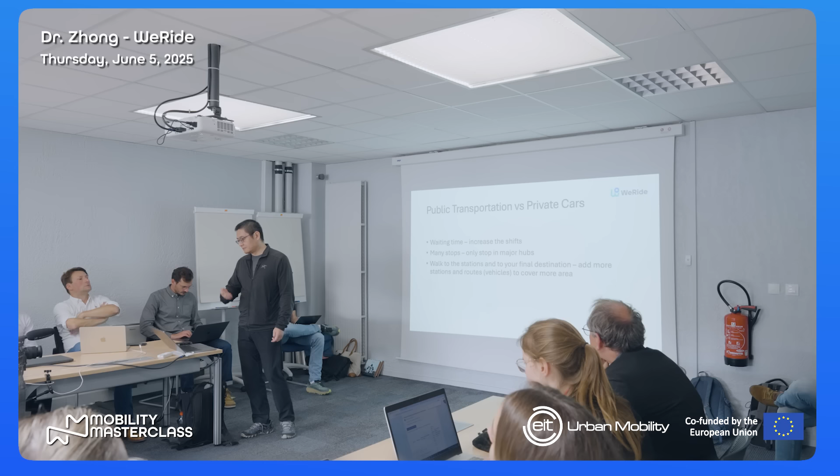Compared to private cars, public transportation has some shortcomings. The first one is the waiting time. You have to wait for the next bus. But with a private car, you just go anytime you want. So to reduce that waiting time, usually you can increase the shifts or the number of vehicles. The second is there are many stops, but not every stop is your stop. With a private car, you go from door to door. You only stop once. The way to reduce this shortcoming is you only stop at major hubs.

And another one is walking from the station. You have to walk a long distance from the station to your final destination. Actually, that part makes a lot of people choose private cars rather than public transportation. The only way to solve this problem is to have more cars, more buses, more routes to cover more areas, but that requires a lot of investment. And in many cases, that's too expensive for many public transportation operators.

So to make it better, I think now many people think it should be a tiered network. That means there's a backbone. It's a train or really big buses or tram or subway. They have really large capacity. Hundreds of people can take one train, and they have fewer stops. They only stop at the major hubs, and of course they have fixed schedules. Usually these major hubs can reach within 1 to 2 kilometers of your final destination. But that's not enough, because the last mile, the last 1 or 2 kilometers, how do you cover that?

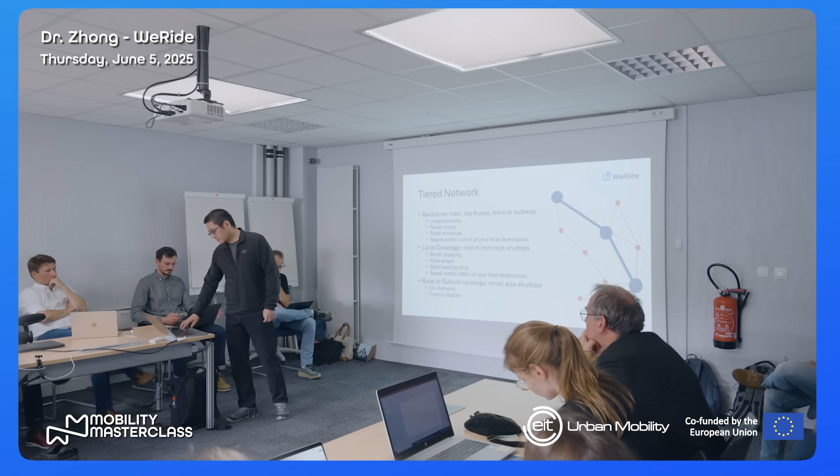But the thing is, in order to have local coverage and rural or suburb coverage, you need a lot of vehicles. That means you need a lot of drivers. And I think everybody here knows how difficult it is to hire public transportation drivers. Even in China it's the same, because public transportation drivers have a higher standard, so it's even more difficult than hiring taxi drivers. So that part actually makes a lot of these plans not viable or too expensive.

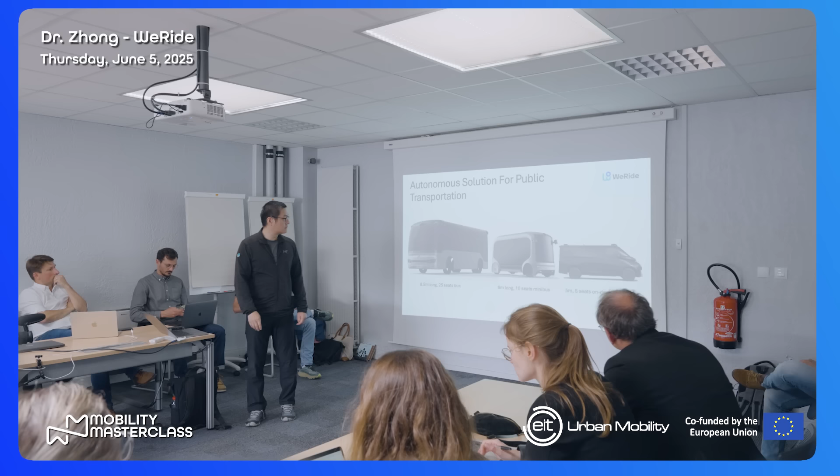So here comes, I think, the autonomous solution, because we don't need drivers anymore, just the vehicles. I think this is the only viable and economical solution for this tiered public transportation system. In the backbone, we still use trains and big buses or big trams, but for local coverage, we use autonomous driving vehicles. And here is our solution. We have several different types of vehicles to help build this tiered solution. The first one is an 8.5 meter long bus. It has about 25 seats.

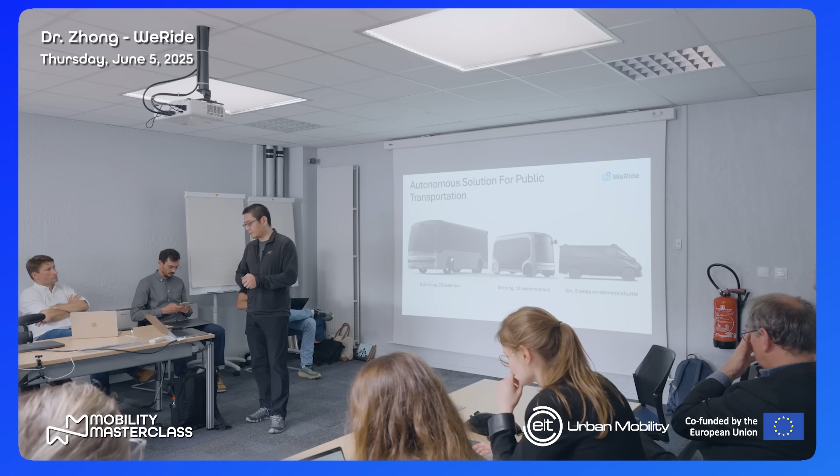Later I will talk more about the details. This is the latest version. We are still in development. The middle one is the one we just took a ride in today. It's 6 meters long and has 10 seats.

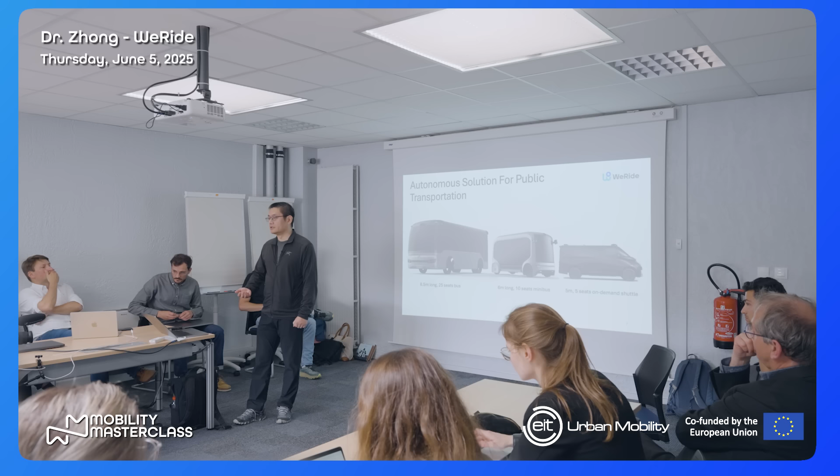Well, the version we took today has 8 seats, because it's modified to be able to install a steering wheel because of the homologation stuff. But if we forget about the steering wheel, we can make it a 10-seater. And the third one is a 5-meter-long van. It has 5 seats. It can run as on-demand shuttles for rural or suburban area coverage.

So the big bus, 8.5 meters long. This is our prototype. We're currently working with the public transportation company in Guangzhou, where our headquarters is. We estimated that by deploying this autonomous driving bus, even in China, we can save about 18% of the operational costs. We know drivers in China are relatively lower cost than drivers here, but even in China, we can still save on operational costs.

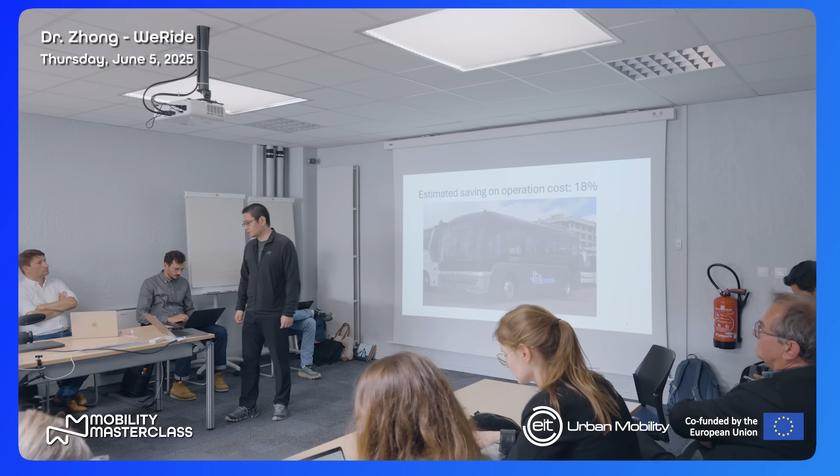And after the pandemic, a lot of public transportation companies or cities ran out of funding. So this kind of savings on operational costs is very, very attractive to local public transportation companies. So we hope this year or early next year we can release this bus. We can begin to replace normal buses from the public transportation companies every year. So maybe in the first year, 5% of the vehicles will be converted to autonomous driving, and then we continue to increase the percentage.

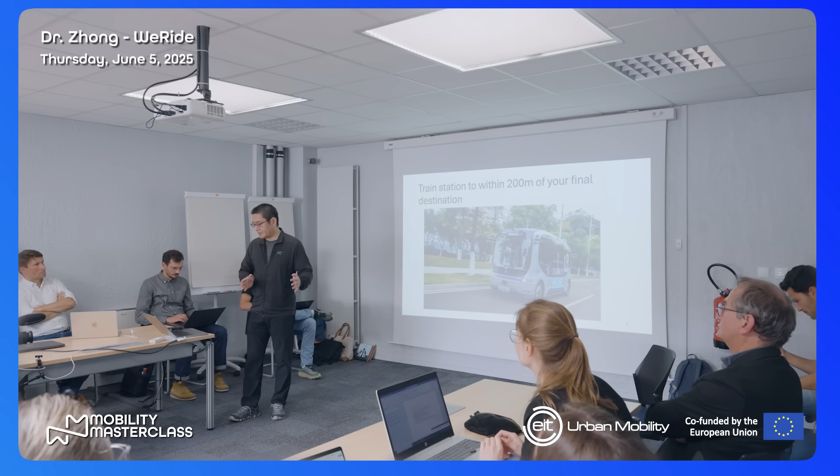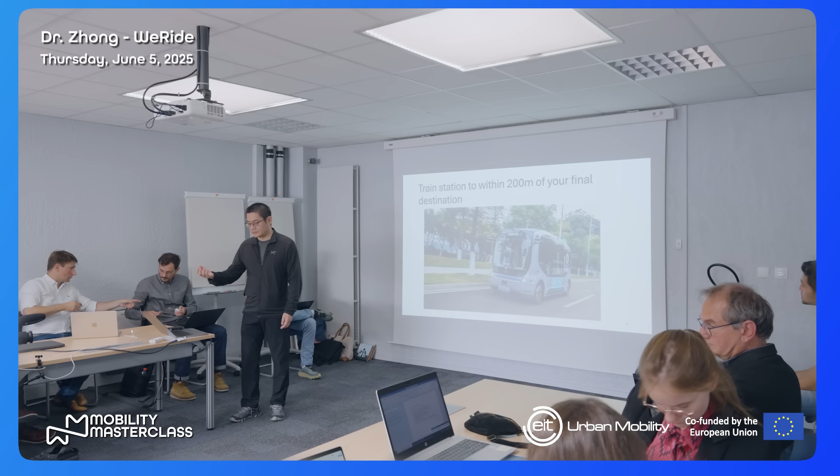And the minibus actually is our first product, because this one is smaller. The technologies we use in this one are closer to the robotaxi we developed. Basically, we use exactly the same technology. We just copy and paste it to this vehicle. So the idea is to use this one to connect subway stations to passengers' final destinations, within 200 meters of the final destination.

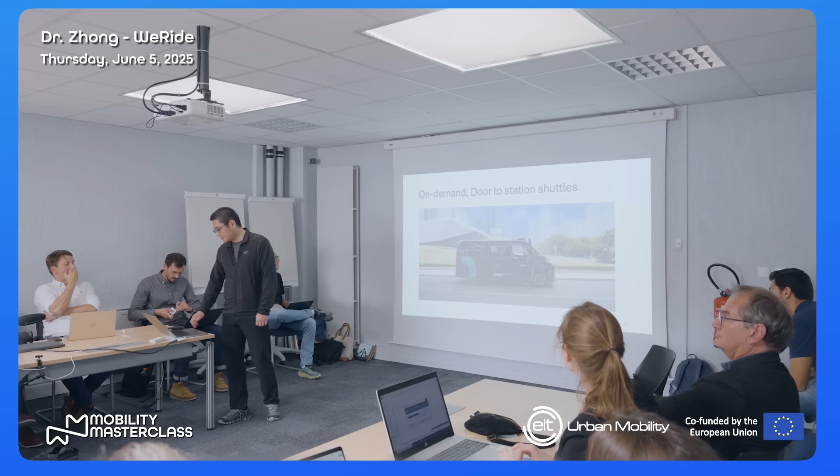And this is the on-demand shuttle we developed with a Chinese OEM. It's designed from the ground up for level 4 operation, so it has a fully redundant chassis and everything we need. And we released this vehicle, I think, last year. In China we use it for taxi purposes, but it can also be used for rural or suburban public transportation coverage. Actually, we're working with Switzerland on some similar vehicles, but not this particular one. But we hope this one may provide better service for that purpose. So that's the product lineup we have.

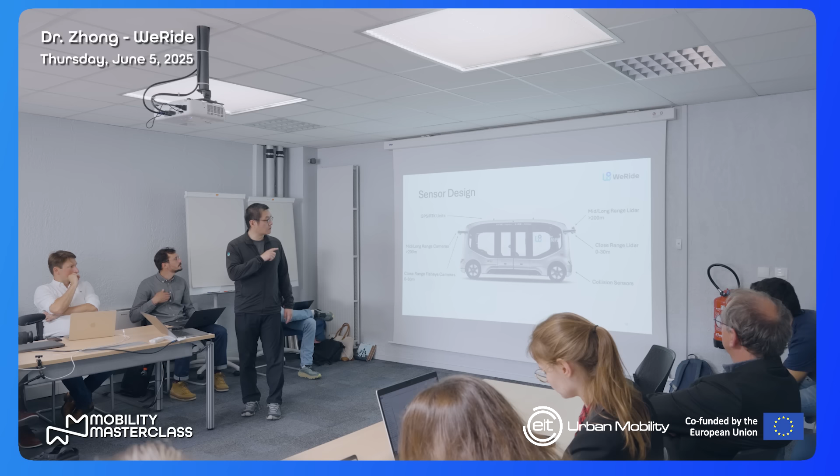And next, I will talk about the technology. This is the engineering part, but not that deep. I think everyone can understand. So basically, we use all state-of-the-art setups for safety and performance. For example, this is our mini shuttle. We have a lot of sensors there. They have 360 coverage all around the vehicle, and there's no blind spot. All blind spots are covered by two kinds of sensors, LiDAR and camera.

So we have the mid to long range LiDAR. They can detect objects farther than 200 meters. And then we have the close range LiDARs, because the long range LiDARs have blind zones close to the vehicle because of the viewing angles. The close range LiDARs can see anywhere from 0 to 30 meters. And we have similar coverage for cameras: mid to long range for 200 meters, and close range fisheye cameras to cover 0 to 30 meters.

And also we have GPS RTK units to have high precision localization for the vehicle. And also around the vehicles, if you can see these bands, that's not for decoration. It's actually collision sensors. So whenever there's some collision with the vehicle, the sensor can detect that, so the vehicle can stop to prevent any secondary damage. So this is the sensor setup for our minibus.

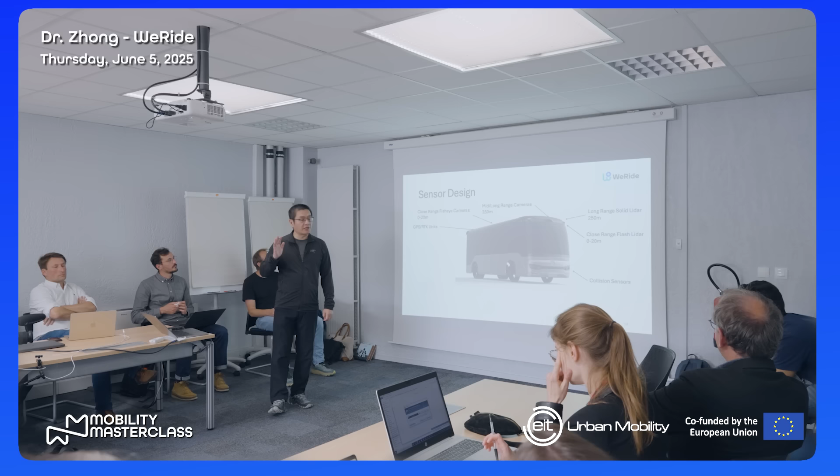For our larger bus or all our next generation vehicles, we changed it a little bit. First, we began to use a solid-state LiDAR. The current one, we still use a mechanical rotating LiDAR. It has 360 coverage, which is good, but the solid-state LiDAR is much smaller. It has better performance and it's much cheaper, which means it's better and cheaper.

So we have this long-range solid-state LiDAR that can detect objects up to 250 meters with 10% reflection rate. Basically it means even if a vehicle's tire is totally black, we can detect it at 250 meters.

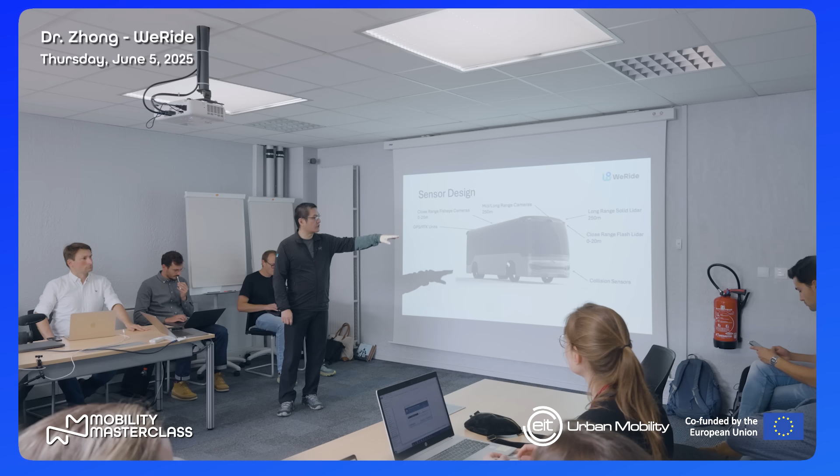And then we have the close-range flash LiDAR. Flash LiDAR is also a new kind of LiDAR. It's much cheaper than mechanical rotating LiDARs and very good for close-range detections. So our blind spot or close-range LiDAR becomes the flash LiDAR. It can detect objects from 0 to 20 meters.

And we also have collision sensors. The collision sensor will be similar to the one we have, but we add another layer of redundancy. So not just the band sensor, we also add an accelerometer, or we could say an IMU, behind all the panels. We can detect sudden change of acceleration. That means if anything collides with the vehicle, we can detect that.

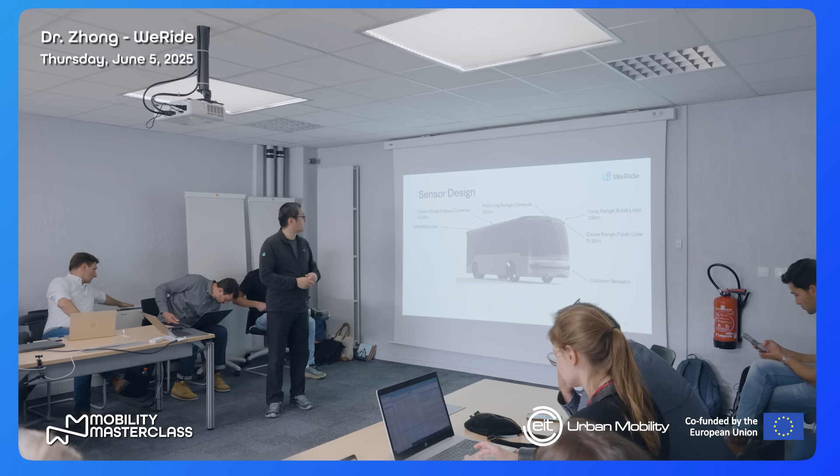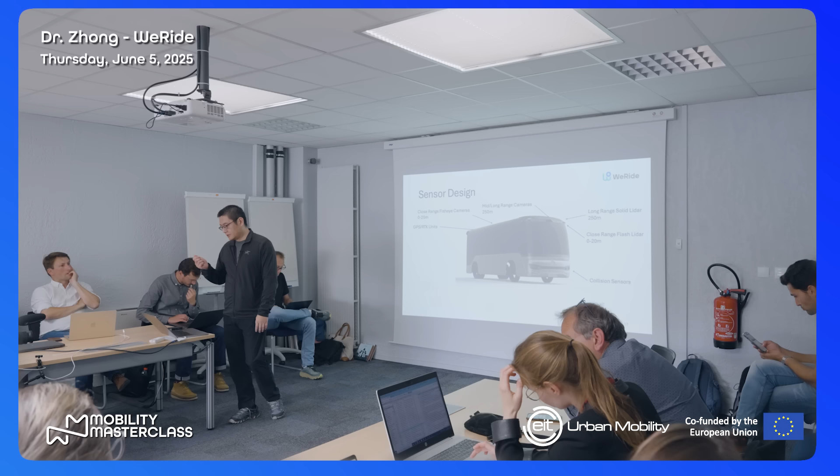And for the mid and long range camera, we actually increased the resolution to 8 megapixels, so we can see objects up to 250 meters. And of course, we also have fisheye cameras to cover the short range from 0 to 20 meters. We have similar GPS units as well. But this vehicle is longer, so we have more cameras and a little bit more LiDARs to cover the close range areas.

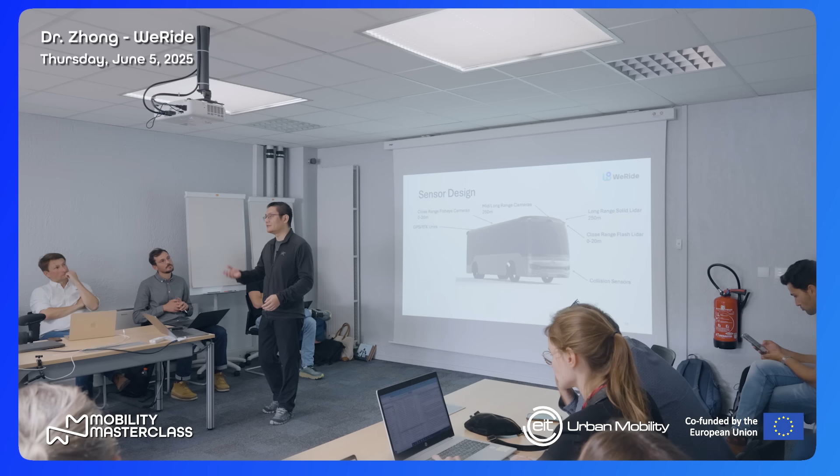The vehicle itself is made working with a Chinese OEM. For this large vehicle, to have a drive-by-wire system, and not only a drive-by-wire system but a redundant drive-by-wire system, is kind of difficult. Before, we only had smaller size vehicles, but now we have this redundant drive-by-wire system for large vehicles, and we have begun to move to 8.5 meter vehicles now.

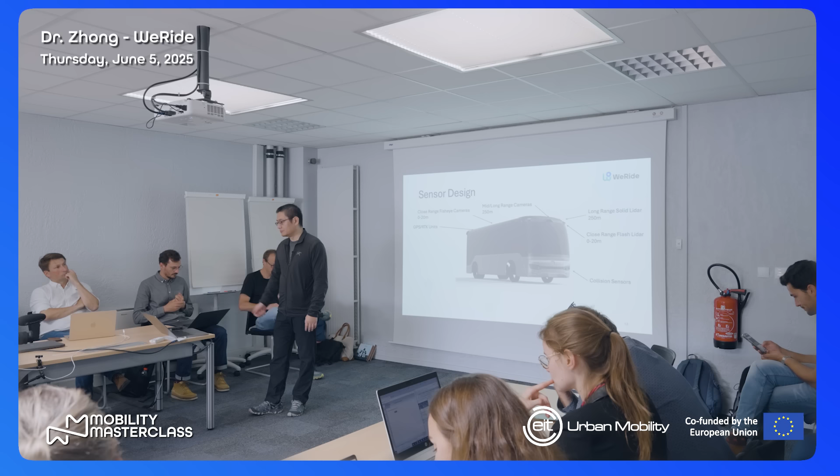For objects very close to the vehicle, I mentioned we have these fisheye cameras as well as the close-range flash LiDARs. The close-range LiDARs are actually installed here, and the cameras are kind of looking down. The field of view of the closest one is almost vertical. That's why we make it protrude a little bit, because we want to see exactly what happens here. So there are almost zero blind zones around the vehicle. Actually, we can see everywhere.

Before we released this sensor setup, we did the simulation. A 1 meter high child standing exactly next to the vehicle, and we can see more than 60% of the child. So we can see it.

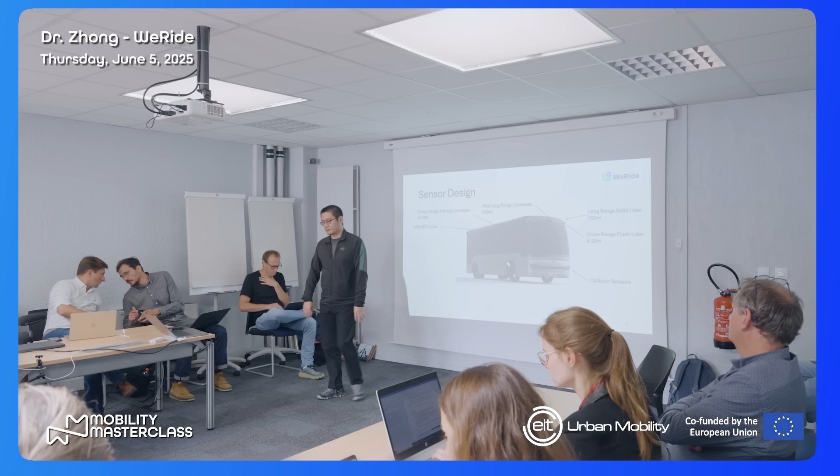For the blind spot LiDAR, we have 4 of them: 1 in the front, 2 on both sides, and 1 on the back. So there's no blind spot anywhere. And all the areas are covered by 2 kinds of sensors, not only LiDAR but also camera. So in some extreme case where one kind of sensor malfunctions, for example in a pure dark environment where the camera cannot see anything, the LiDAR can still see things. So it's fully covered.

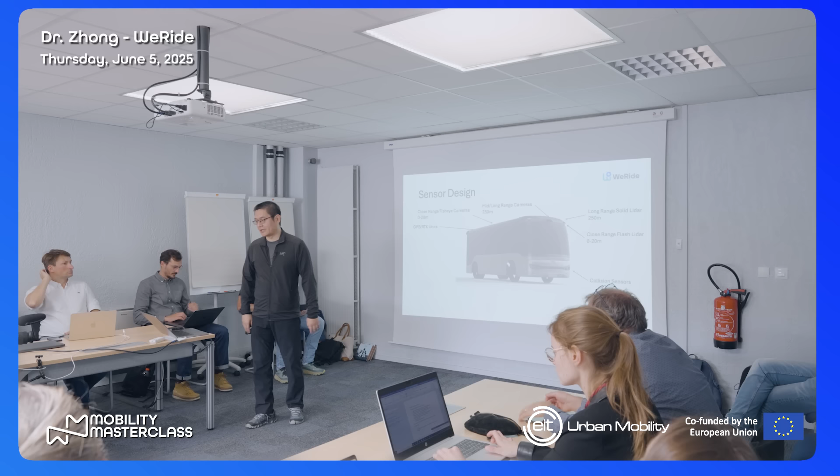The gap between the curb and the vehicle is not because we cannot see the curb or anything. I think it's mainly because when there are people standing by the curb, our vehicle usually gives some padding, not very close. So technically we can park very close to the curb if we want.

Yeah. To avoid an object, it's not just stopping, you can also steer away from it. In most cases, if it's very close, you can steer away. But even for stopping, at 250 meters, I cannot remember exactly the number, there are quite a few seconds to stop your vehicle.

If you only use a braking system, that is still capable to do that for this kind of vehicle. The computing units are very important for any AI running in the system. The current version we use, we call HPC, high performance computing units 2.0. That's our Gen 2 units. It has 1,000 TOPS of AI computing power, but it consumes a lot of energy. The peak energy consumption is about 1.6 kilowatts.

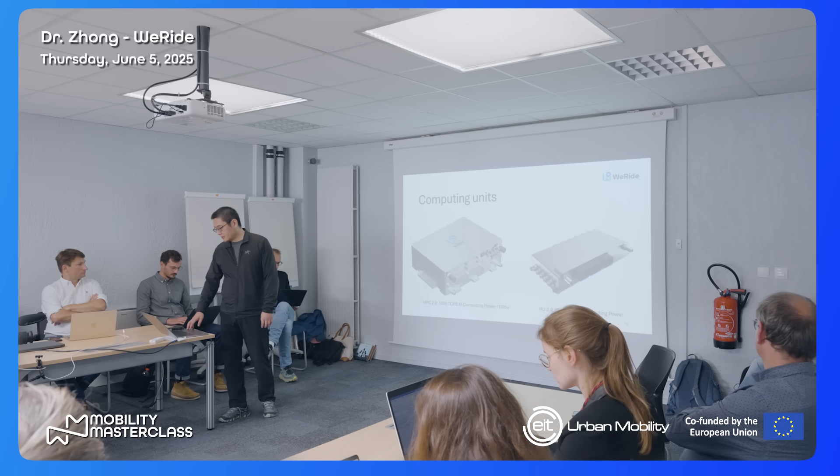And also we have a redundant unit. It's a reduced power unit just to make sure when something happens to the main unit, the redundant unit can support the vehicle to do a safe pullover. It has about 250 TOPS of AI computing power.

The second half of this year, we will release our latest version of computing units. We call it HPC Gen 3, 3.0. It will double the computing power to 2,000 TOPS, but reduce the peak power consumption by almost 2/3, so back down to 500 watts, and everything is auto-graded. So it's ASIL-D rated units, with higher reliability and really high computing power.

We still have the similar redundant units. These are more details about the different generations of computing units we have. So at the end of this year, we will switch to HPC 3.0. It will be very powerful but consume less power, and be more reliable.

And the very important thing about autonomous driving is safety. A lot of safety comes from redundancy. The redundancy is not only for the vehicle itself, but the whole system. This is a very simplified description of the redundancy design we have.

It starts from the sensors. As I mentioned, we have two kinds of sensors to be the backup for each other. And for each kind of sensor, LiDAR or camera, their FOVs also have some overlaps, so that within any single kind of sensor, they can also be the backup to each other. So that's the sensor redundancy design.

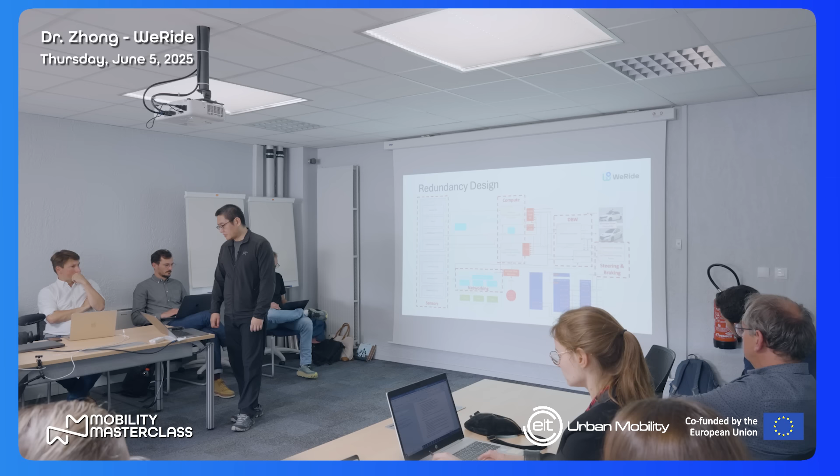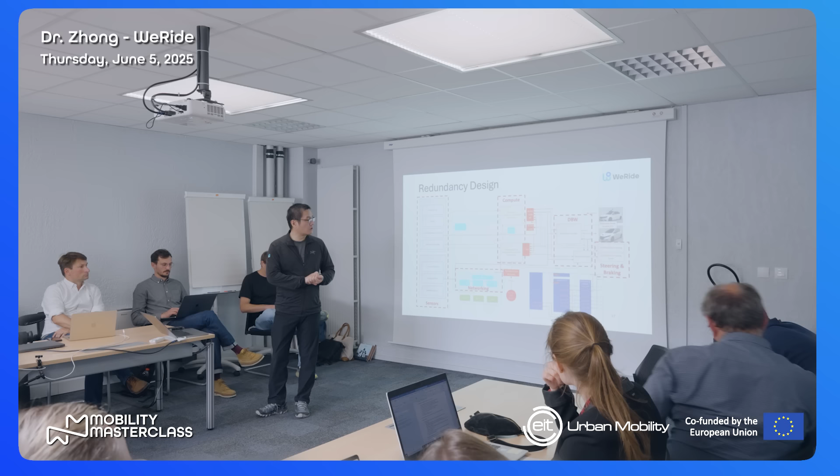And then it's the DBW, drive-by-wire system, actually connecting the brain of the autonomous driving system to the vehicle. We have a dual, mirroring setup, so the connection is also redundant. And eventually going to the vehicle itself: the steering, braking, communication, as well as the power supply. We require the base vehicle to have all the redundant drive-by-wire system and actuators as well.

That's why we spend a lot of time working on the vehicles, because normal vehicles don't need this kind of redundancy, because the ultimate redundancy is the driver himself. So they don't need 2 sets of drive-by-wire systems. That requires an OEM to add additional parts, hardware and software to implement that. So overall, from software system to sensors to computing units, everything is redundant in our vehicles.

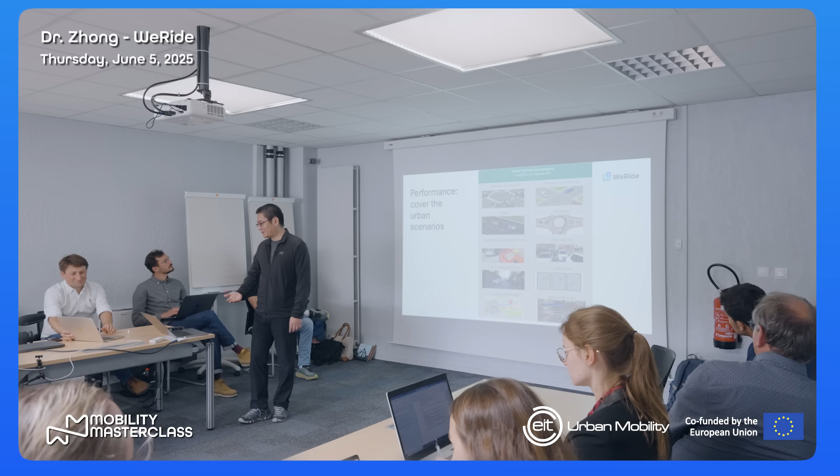And the performance: of course, our algorithm is designed to cover end-to-end urban scenarios. That means from where you start to where you go, everything will be covered. These are some typical scenarios we can handle, but basically everything that happens in an urban area, we should be able to handle.

Okay, so the minibus is a very mature product from WeRide. We have already deployed in more than 30 cities, and we have been doing this public transportation operation for more than 5 years. We have deployed more than 300 vehicles in 7 different countries. And at the end, I have a short video to show our bus.

Guangzhou is our headquarters. This is in Abu Dhabi. This is in Vegas, and in Singapore. This is last year.